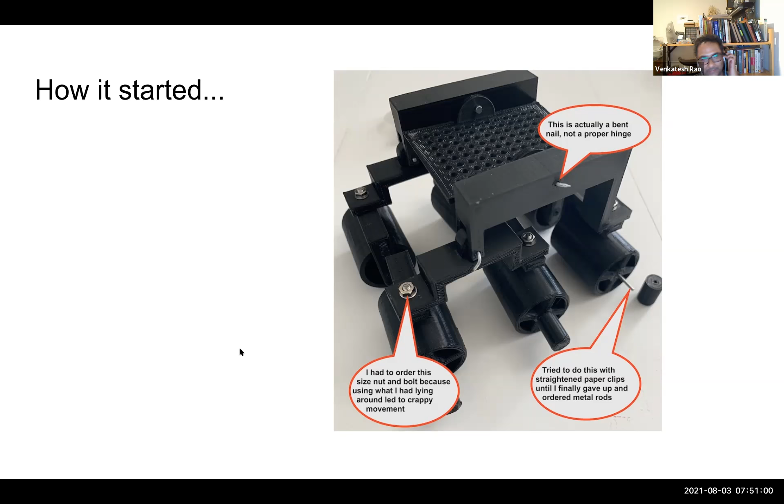And I tried to initially make an axle out of bent paper clips, but that proved to be too janky. So I at least bought some rods and made a real axle. And I've ordered my first actual part besides 3D printed filament, which was some M3 nuts and bolts. So that's where I started in January. And how it went, Jan to March, I did these design studies. Then I started scoping for parts, trying out various things in April.

If you remember my second design update, I was still thinking of using the TT motor, and that's when we had some discussions, and I think Yasha recommended the N20 because I was not aware that the N20 small motor came in multiple gear sizes. So that turned out to be a good choice. So I made the switch. I learned about turnbuckles. I built this little mechanism for trying out how the turnbuckle differential bar works. So all this was how it was going till May.

And sometime in April, I was doing a lot of shopping all along the way. So a good way to track state for my build, since it's a from-scratch, build-everything kind of build, the bill of materials is actually a good snapshot of project state. So this is what it looked like in April. You can see a bunch of interesting things here.

Towards the lower right, there were a couple of sample ball joints I was going to use. I only had the one N20 motor, but this was I think a 24 reduction motor, so one of the fastest N20s. And later I switched to a very slow, extremely high reduction motor. It was a 1:298. But okay, so this was where I was in April.

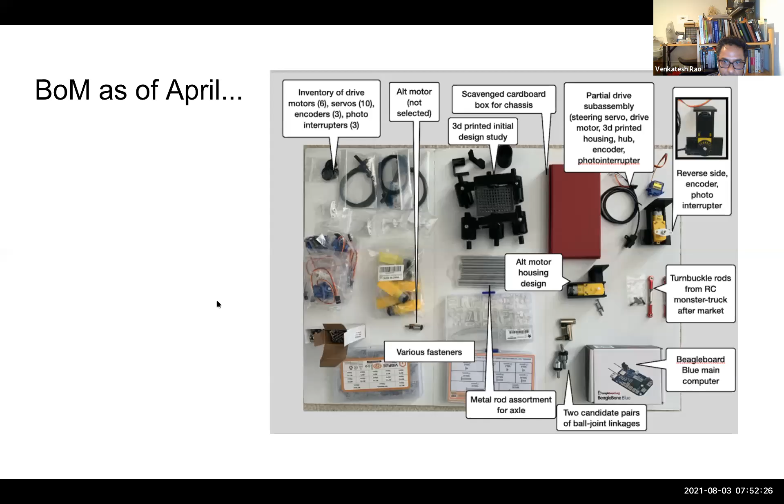Okay, so now we get to how it's going. So I've kind of split my project into two parts because the mechanical part was so complex. I realized if I waited for the mechanical part to be done, I would never get to the electrical and compute. So I decided to build the simplest mechanical thing possible just so I could get to the testing of all the electrical components and compute.

So going with my naming scheme, since my main build is called Nature is Murder, I call this Accessory Before the Fact. So an accomplice before the murder. I'm very pleased with that name. But it's just a single piece body. Instead of 4 drive wheels, it has 2. It still has 4 steering servos like the main build. It has 2 passive wheels.

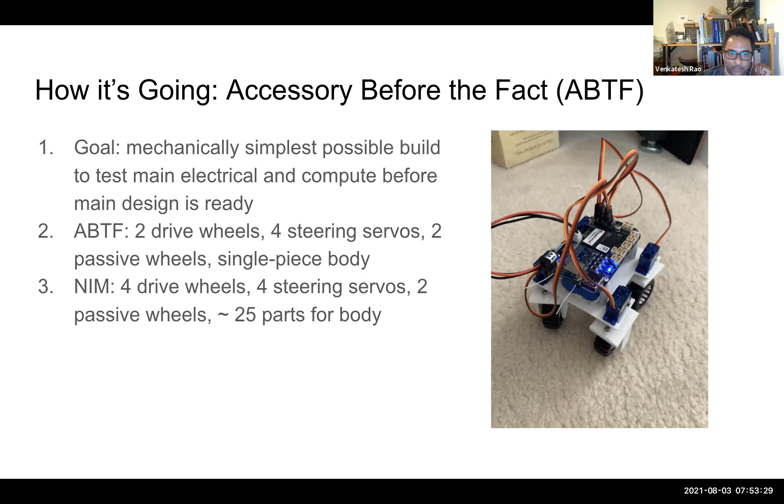But the main thing is the body is just one piece, a single 3D printed piece instead of about 25 for the main build, as you'll see. But even that ran into problems. So the first chassis I built, I kind of just winged it and printed it. And then I realized, I forget what they're called, the riser strut-like things. What are they called? There's a specific word for them. Screw boss? It's not screw boss. Standoff, yes.

So standoffs. So I had these integrated standoffs that I designed, but I forgot to measure the battery. I kind of just eyeballed it. Turned out to be too low. It wouldn't fit. So then I had to redesign, as you can see on the right, and that was big enough to shove the battery underneath because I wanted the battery below for a lower center of gravity.

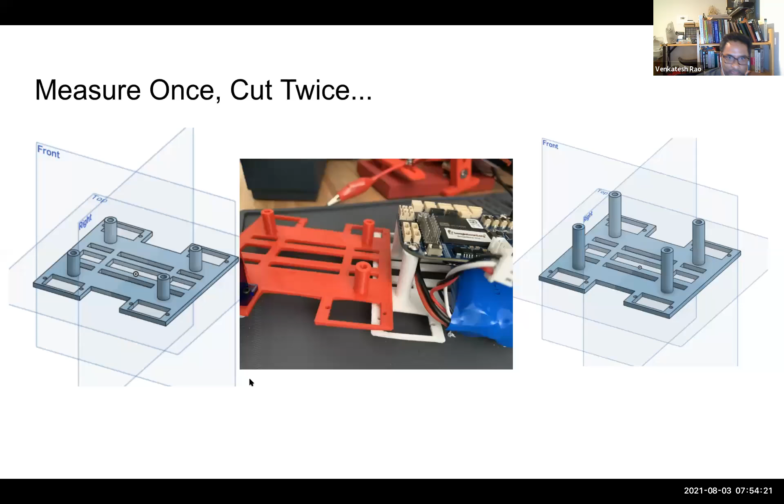Oops. Okay. So this, after printing and everything, took like a whole day to build, and it looks simple, but there are lots of subtleties. This was weirdly more challenging than I thought for kind of stupid reasons, which I should have really anticipated. But I got it done, so this is proof.

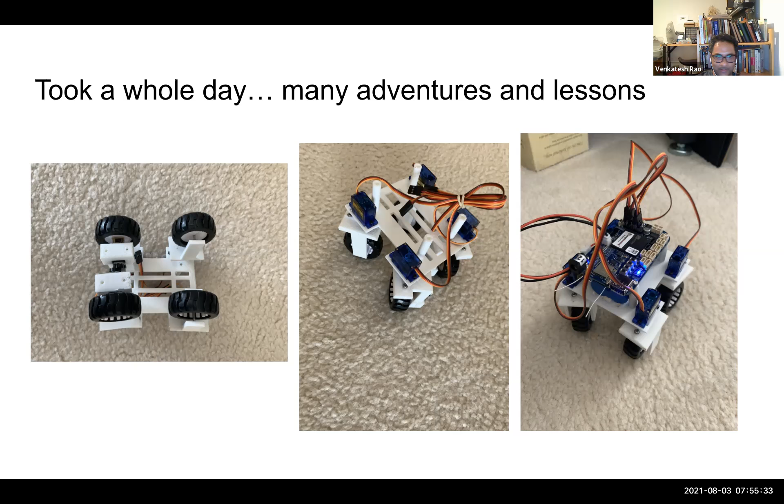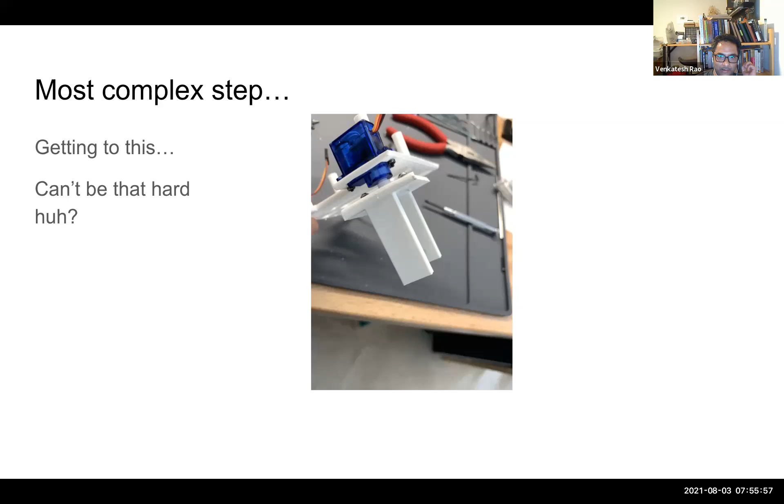So the most complex step was basically this: this is the SG90 servo. It just goes through a hole affixed to the main chassis, and then it is bolted onto the motor fork. This is actually the passive wheel fork with a horn. So this can't be that hard, right? So look at all the things I managed to get wrong.

So in my initial design for the little strut, I forgot that I actually need access to the bottom of the servo horn to screw it onto the servo motor. I didn't design that into the print, so I had to drill holes afterwards. But that turned out to be useful because I next discovered it was really hard to hold this servo horn down on the part, clamp it firmly enough to fasten it. But now that I drilled the hole, I could just hold it with a bolt. So that turned out to be dual purpose. That was my work holding solution.

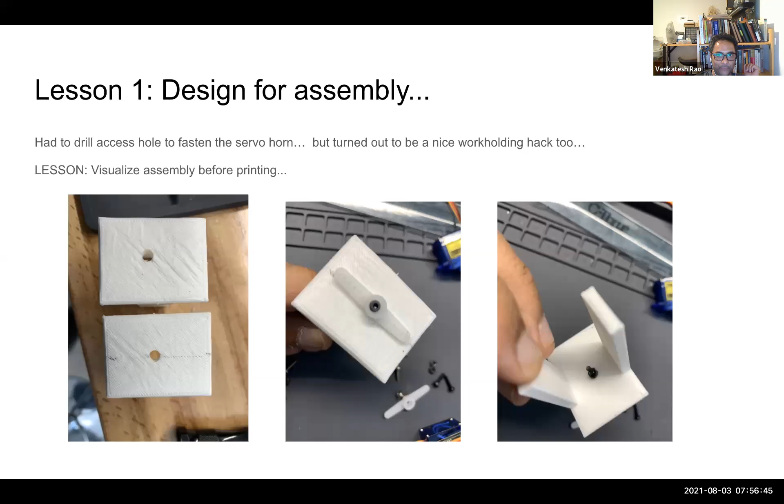So visualize assembly before printing. It's kind of an obvious thing they teach you in mechanical engineering school, but it's easy to forget something as simple as you need a hole to screw things in.

Another one, so the servo motor and horn came with a couple of screws, which it said were self-tapping screws. So I assumed I could just shove it through the hole and screw it in. Turns out it didn't want to really go into PLA. PLA is stronger than it looks. And what happened was, it's a very small, delicate screw. It's like, I think M2 or something.

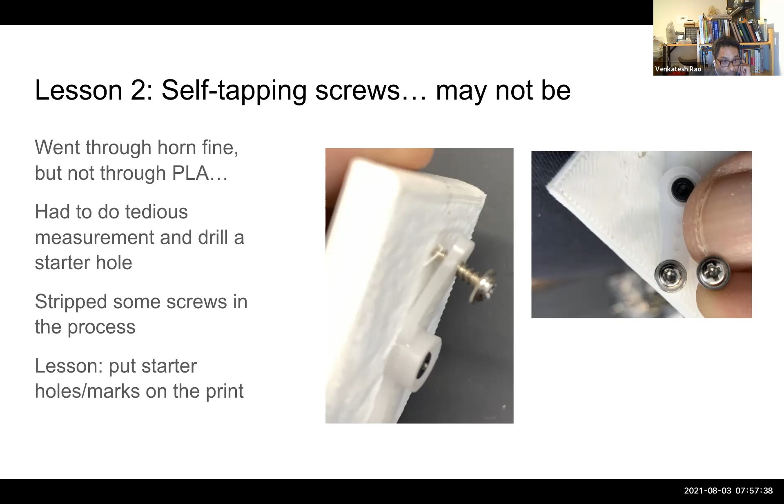So as I was turning it, it was just pulling up the horn. It was not penetrating the 3D print. And I managed to strip the screw head, as you can see on the right. So basically, then I had to pull this off, drill starter holes, and then I was able to fasten the horn. And I kind of had to use needle nose pliers to tighten the screws because I'd already ruined the head. So lesson is put starter holes and marks on print everywhere if you can.

Lesson number 3 from this initial build. This actually initially worried me, and it turned out to be easier than I thought. So I bought these 6 wheels, or toy wheels basically, for the N20 motor. As you can see, it is cut for a 3mm D shaft over here in the middle. And I didn't know how to do the passive roller wheel with it, but it turned out I could just shove a 3mm shaft in and it rolled pretty well.

So this is a good enough solution for the accessory before the fact, because this is not a rugged design meant to actually do roving. It's just meant to test the motors and electronics. So it's good enough for this. But for NIM, the Nature is Murder main build, I'll probably be designing separate passive and active wheels with the proper bushings or bearings.

This was a fun one. So for the passive strut, that's this one, to hold the wheel between the 2 parts of the fork, I wanted to get the size exactly right. And I wanted basically a compliance interference fit. So shove a rod in between. This is not a through hole. So I just wanted it held in between the 2 ends of the fork. And I thought a clever hack would be to cut a toothpick approximately to size to make sure it fits directly in the fork. And that turned out to be about 27mm.

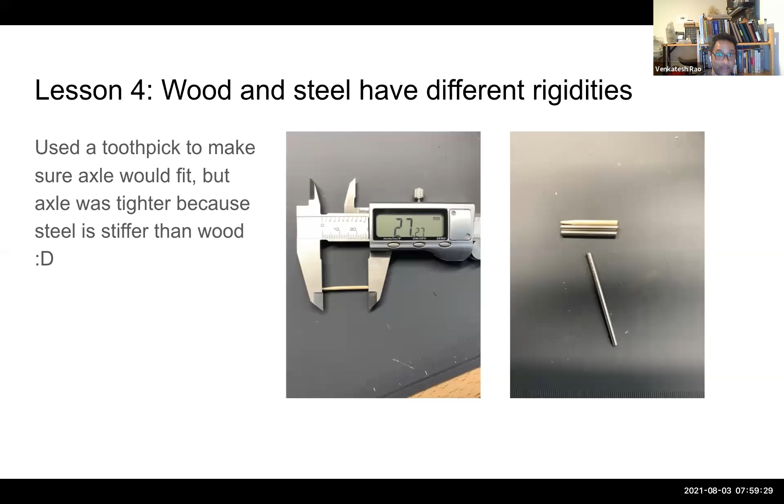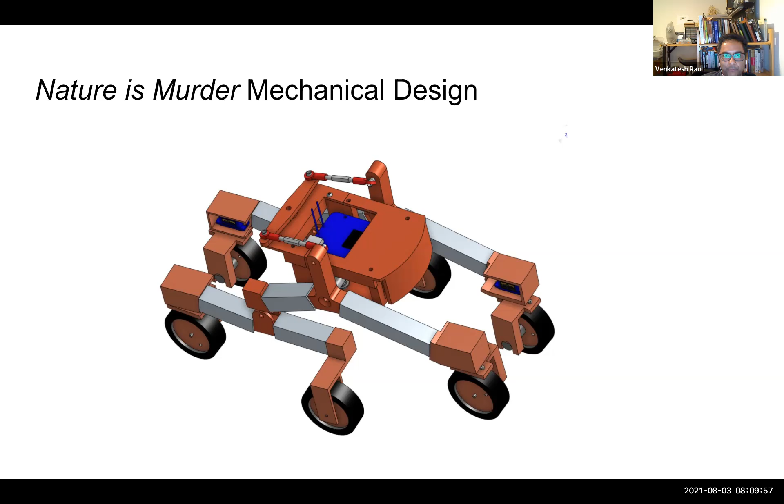All right, so this is where I think I've made the most progress: the actual build of the main mechanical design. I'm trying to be smart here and do as much as possible in the CAD tool, so I have to do minimum iteration cycles of print, redesign, and stuff like that. So I'm actually putting a ton of effort into this.

Just to give you a quick idea of the boundary conditions here, there are 4 major large physical components that constrain the design of everything else. You've got the board itself with its constraints of how big it is and where it needs to fit. You've got the ball joints, which are the most complex linkages for connecting the body to the rocker-bogie side mechanisms. You've got the battery, and then you've got this turnbuckle linkage that I bought from a hobby shop.

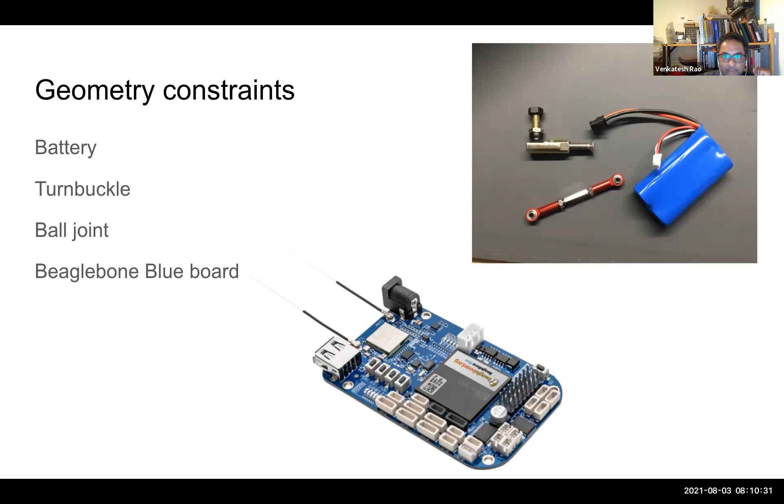So let me escape this and switch to Onshape so we can look at that.

All right, can you guys see my Onshape dashboard? Okay, all right.

Honestly, I'm feeling proud about this. This is the most mechanical engineering I've done since 1997, when I got my mechanical engineering degree. Looking at what I've done here compared to what it took to earn that degree, I feel like almost a fake. Actually building a fairly complex real thing is so much more work than just hacking out a term paper project level stuff. Back then, of course, AutoCAD was primitive, parametric design was new, solid modeling — the first solid modeler I used was during an internship at a robotics lab in Bangalore in 1996.

So this was a defense robotics lab, and we used Pro Engineer and I-DEAS, the very early versions. My actual mechanical engineering drawing classes were all on 2D pencil and paper, like actual drafting with a T-square and a drafter.

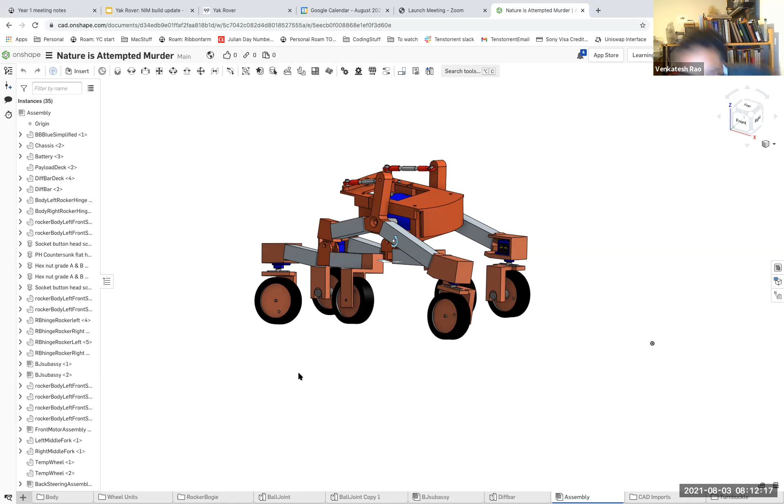All right, so this is actually a fully assembled kind of thing, and this was a bitch to assemble, frankly. So let me increase the size. Is it big enough for everybody to see?

Okay, so let me just give you a little overview tour of the features. All the joints are live and active, and I'll give you some highlight details. But let's zoom in on a couple of interesting features before I show you some pieces.

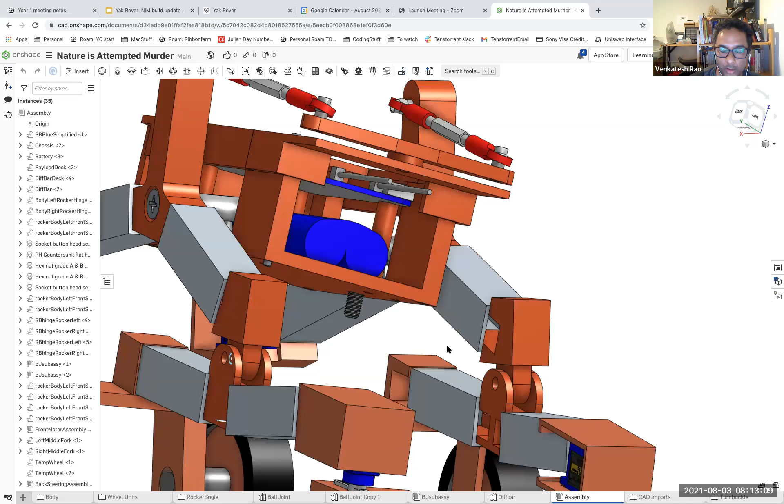The overall body construction, all the red parts are going to be 3D printed out of red colored PLA. The silver bits are aluminum tubing. Let me see if I can grab one. So this is half-inch aluminum tube, which I plan to cut into the right members.

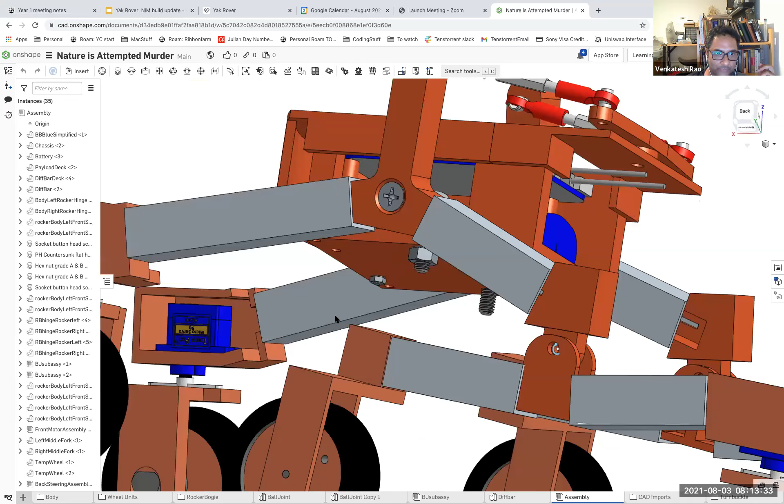And this entire mechanism is built out of press fit. So I'll show you some of the components. Let me actually see if I can.

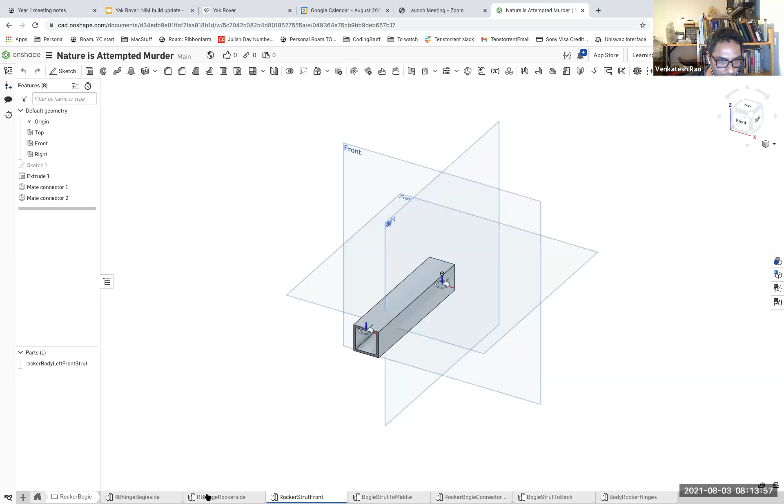I'm going to switch back and forth. Let's see. So you can see kind of the logic of how I did this. So a bunch of these struts are pieces of aluminum cut to size. Then you've got all the connector parts, which are things that look like this.

And a couple of things I want to point out, this is kind of the advantage of doing the accessory before the fact build. So the trick I discovered with compression fitting the cap on top of the motor end thing, I'm reusing it here. Little slot here that will hopefully make the compliance work, and this will just shove into the aluminum square member. So this thing should just fit into this, okay?

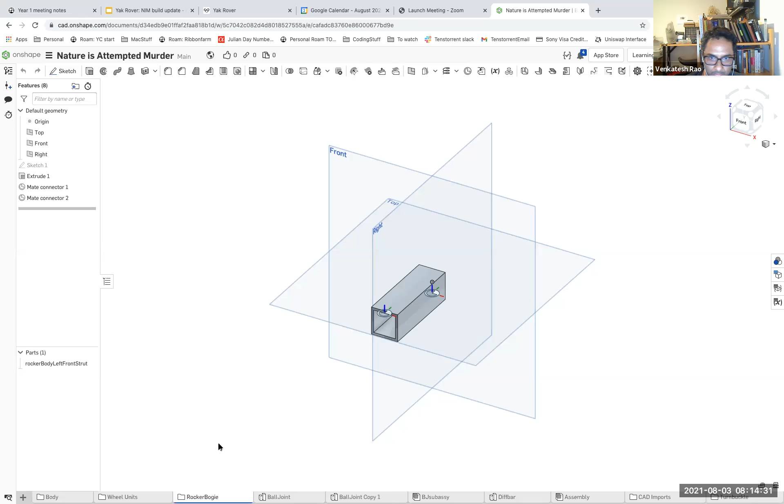And were you doing anything to increase the friction between the plastic and the aluminum?

I'm hoping compression is strong enough to do the job, but if not, the two options are: one is to drill a hole and use bolts. Nuts and bolts are bad for this, so I might use something called a pop rivet. A pop rivet is this thing you can shove in from one end and fasten from just one side. But I want to avoid that because that's basically irreversible assembly, and one of the things I'm going for in this design is to make it as reversible and modular as possible.

So I hope the compression fit will be tight enough to hold for light roving, but loose enough that with a pair of pliers, if I compress it and pull it out, it just comes apart. But if not, we'll see. There are some options, like I can do these push tab kind of things, like a hole through which a little tab pops out, things like that are possible. But I'm starting simple, just a simple compression fit.

And what about having a locking screw?

The reason I'm asking, the robot shakes, it jumps around, and these friction fittings can move.

I think from my experience with the accessory before the fact, it's pretty tight. I think it's not going to jar loose if I get it right. But if it does, my initial plan is to just make it tighter, like reprint the part with a narrower slot or something, and try to make friction do the job as much as possible. But if not, one extreme solution is just glue. Once you've got the final assembly done and the wire harness threaded properly, you can just glue it together if you don't intend to take it apart.

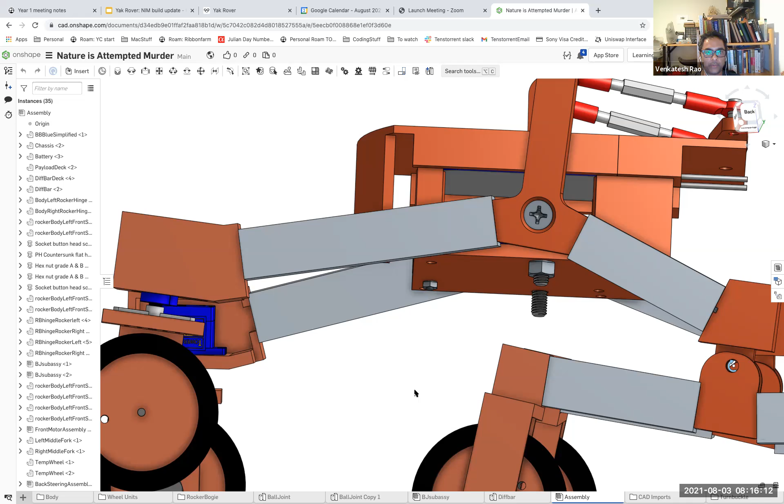Let's see, a couple of details.

If you look here, all these joints are 3D printable with no overhangs, so they can be 3D printed without too much complexity. There's a couple of exceptions, but mostly they can be easily 3D printed.

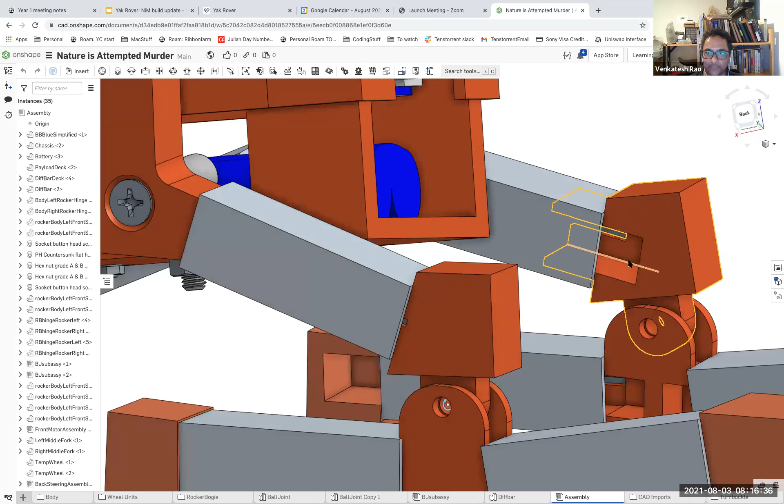So this, as you can see, is a little hole. I've designed this so that where the aluminum tube fits into any of these parts, a little gap is left, and this is for threading the wire harness through. For example, this is a drive motor. From this end of the N20, there'll be 4 wires coming out for the Hall effect sensor.

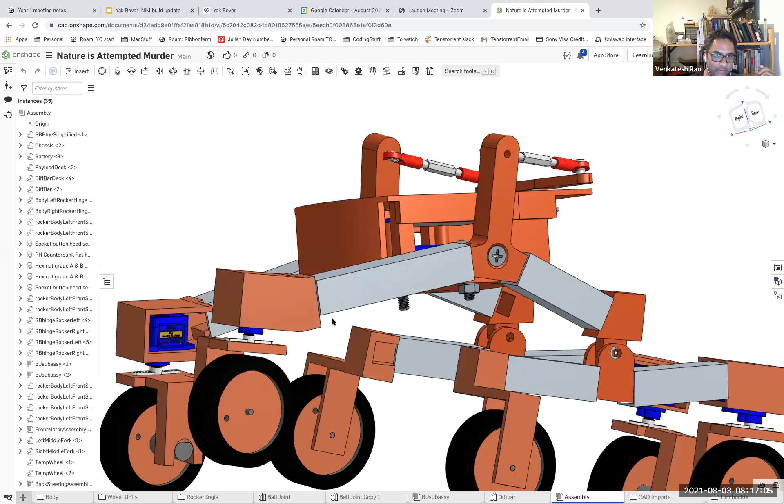It'll go into this, and then thread into the tube from there. Let me hide some things because they're getting in the way. So you can see the logic: the wire will thread through here, get into this tube, come out of this gap here, and then go to the board. Same thing over here—it'll come in through this tube, come out through this one, go up into this one, come out through this hole, and then go to the board.

I'm hoping that the portions where the wire harness is exposed and open to getting damaged, cut, or weathered are fairly limited, only around the moving hinges. The reason this even has to be done is that this is too compact—this whole rover is going to be about the size of a shoebox, so there's not enough room to thread all the wire completely internally. You could make the joints more complex so everything is inside, but at some point that'll make the size larger or the design way more complex.

Okay, so that's how the wire harness works. That's the main chassis, and you'll have the BeagleBones sitting here. Oh, by the way, all these little things you see are mates—mates and mate connectors. These are how the different parts are joined together.

Some of them are active, like revolute joints or hinges, and other things are fixed joints. Let me hide all of them because they're in the way—if you look on the left sidebar you'll see just how many there are. There's 42 mate features already. Can you see on the left sidebar? 42 mate features. And I don't know how many parts—I've lost count at this point.

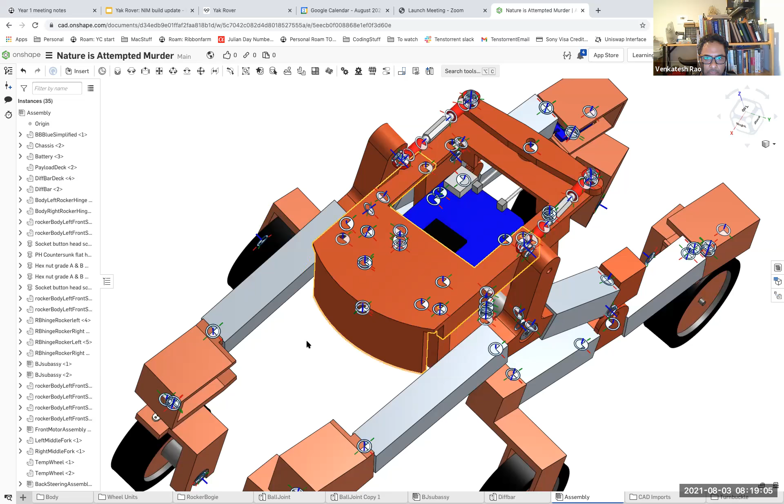Okay, so this is the top view, and this part that I've highlighted is basically the payload deck. I have a couple of thoughts on this. One is that this is likely just replaceable—if you want a payload deck that can do camera, you'll put on a camera deck, and if you want one with a little manipulator arm, you can put that on. That's one way to do it.

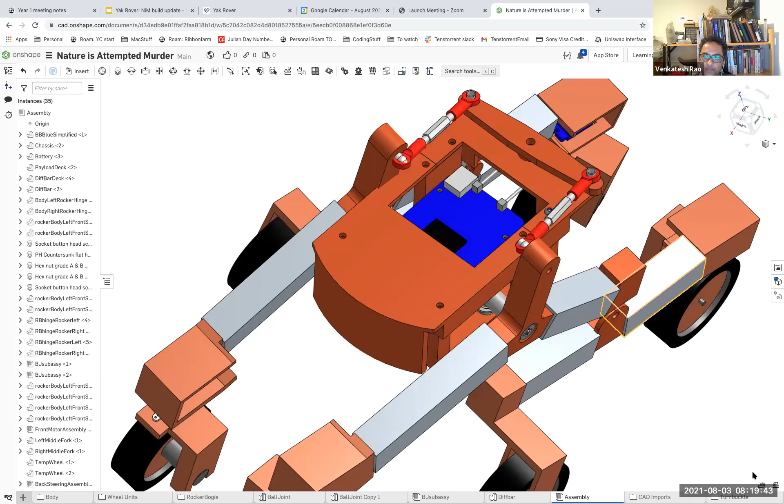Another way is to add a few more holes here and have a landing deck on front that can be bolted on, same thing in the back. In the back there's a little bit of room—this deck is basically there to hold the differential bar pin joint, but there's also room here. I could attach or extend this so that both the front and rear decks can be expanded as much as allowed by mechanical stability and geometric interference.

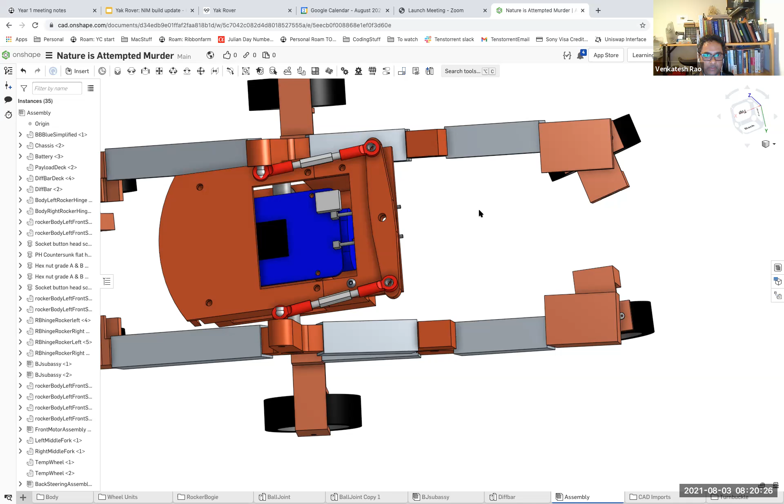Within those constraints, I think the motors are powerful enough to actually move quite a big load, so it's actually just geometry that's constraining it. So if you have the right stability balance and geometry, this will work.

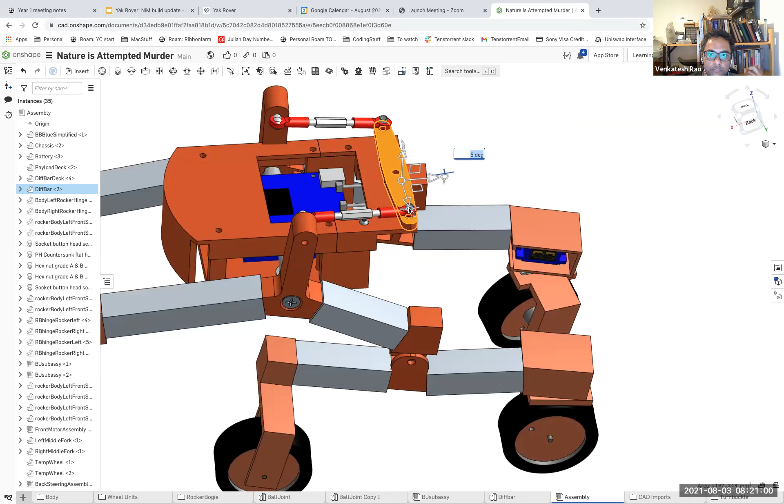This is obviously the most complex mechanical part—that's the differential bar. It's connected through these turnbuckle linkages to these rocker hinges. I'll tell you a little story about that, but let me just show you how that'll move. I'm going to move it a little bit and you can see—oops, wrong direction. Okay, can you see the mechanism moving?

So this is already pretty much ready, with a little finishing touches, to import into an animation tool and be put into a simulation program. This would be for a very high fidelity mechanical simulation for things like dynamics, friction, is it going to fall, is it going to topple—that kind of simulation is what I have in mind. But simplified versions of this could be more mission-level, like how are you going to get from point A to point B. But this is fairly detailed.

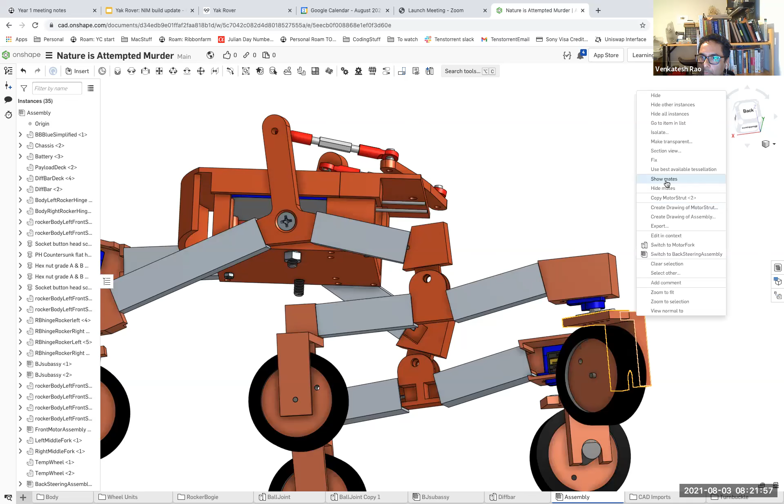Let me show you a couple more of such animation things. This Onshape actually allows you to do some animations. Let's hold on just a second. There's an easy way to do this.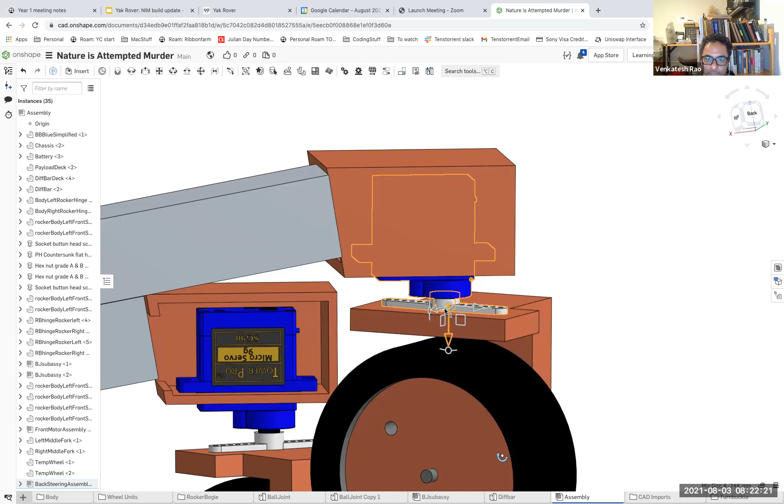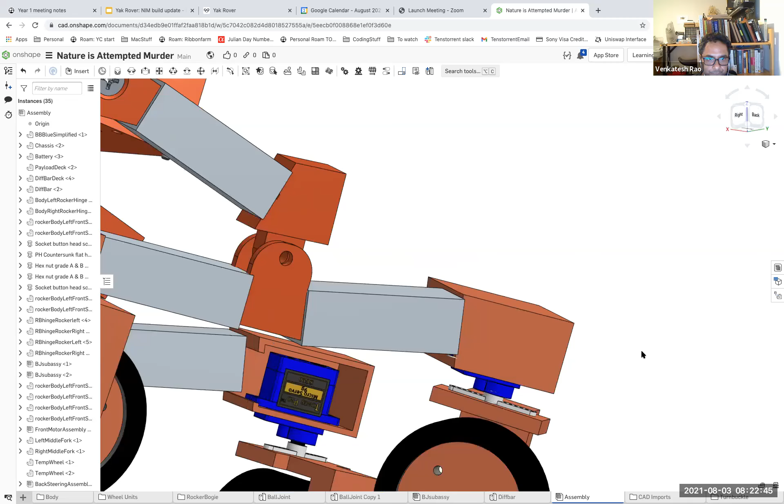All right, never mind. I'll show it in a simpler assembly or something. Wait, this is all attached. But yeah, you can animate these things. I'm still learning the animation features, but yeah, I can manually move a few things around.

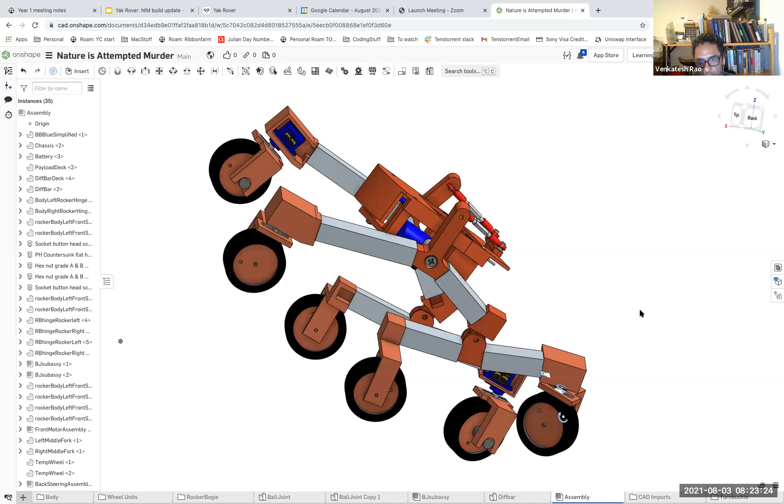And this is a constraint solver, by the way. It's got 1, 2, 3, 4, 6 ball joint linkages and something like 10 cylindrical linkages. And all these are defined in the assembly diagram. And when you try to move it around just manually, it'll actually try to do the constraint solving and move the whole mechanism around. So let me try and illustrate how this works.

Okay, this is not solving very well. This one should solve well. Yeah. So it tries its best to solve. It's not very good at it. So it won't always move the part you think is going to move. It might move everything else to solve the constraint. Anyway, it's very easy to get this horribly mixed up because it does not check for interference.

And one of the limitations of Onshape I've discovered is it does not allow you to constrain ball joints by how much they can move. So a ball joint gets defined as a ball that can just basically roll inside another hollow ball, which means, so this is where my fun story comes in. When I was initially trying to integrate the turnbuckles, I didn't get the length quite right. And when I created those constraints, it went crazy.

It turned this into a completely messed up pretzel, and nothing I could do would get the whole assembly back in order. And eventually what I had to do was basically turn off the constraint of one of the ends of the turnbuckles and then manually rearrange the whole rover to look right. And then arrange the turnbuckles to the right length, reinforce the constraints, and then it was able to solve.

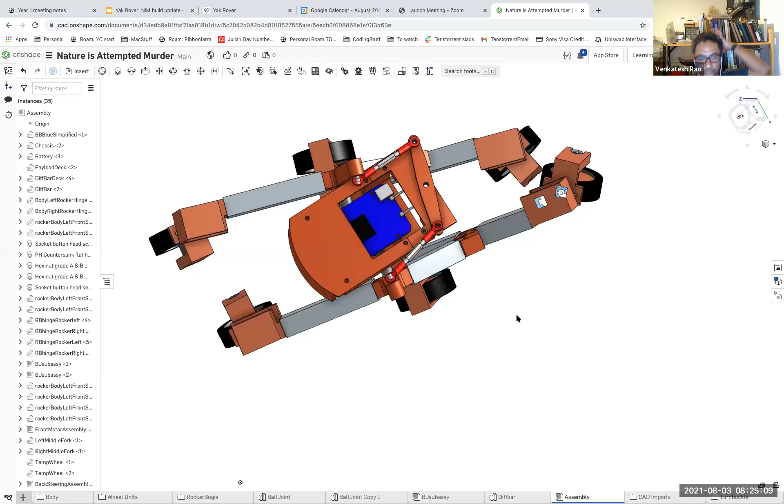And I think what was happening was when I initially assembled it, even though it was possible for it to actually get to the right configuration, it was near some other local equilibrium of the mechanism, and it was going into some pretzel shape because it was not constrained enough in the design. All right, so a couple other things, let's see. Oh yeah, so this was the hardest freaking thing to design.

Does the tool impact the angles we see on the rocker bogie? The what? You know, on the rocker, it seems that there is an angle that is going. You have the V shape for the bogie, and the rocker is, or the contrary. Could you show it again, please? Let me go back there.

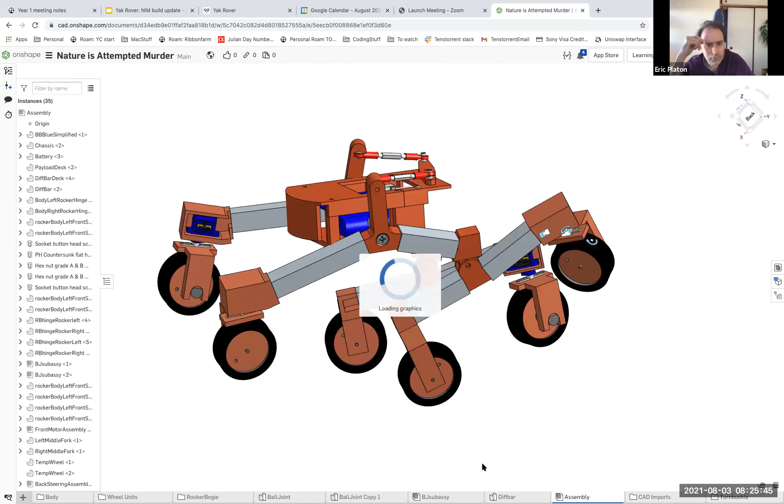Yep. So these are fixed angles. These joints, 1, 2, 3, 4, 5. So there are these 5 elements. I just lost all my highlights. Let me re-highlight them. So yes, 1, 2, 3, 4, 5, 6 plastic parts that connect the aluminum things. Each of them has specific angles, and that's fixed.

Initially, I was kind of trying to be more ambitious and making those reconfigurable angles as well, but that got too complex. It was introducing too many angles. So now my plan is, even though I can change it in the parametric design, I'll show you a couple of examples. Even though I can change it, the idea is just to keep it fixed for one design.

And this is, by the way, very rough geometry. I've just roughed it out, and now I have to do the projection on the flat plane and actually do the calculations and get the geometry exactly right so that the wheels all line up on the flat surface and stuff like that. So I haven't actually done the final calculations. Think of this as a topological design. So the topology is correct and the geometry is roughly correct.

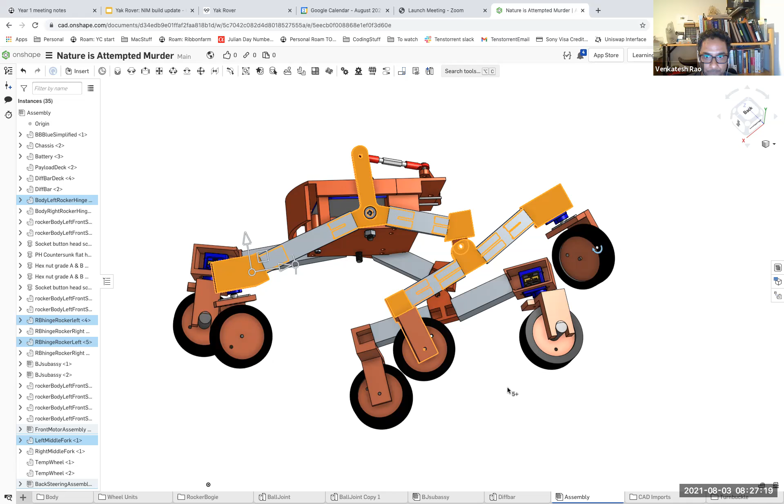Now I have to get the geometry exactly right so that the 6 wheels are on the ground at the same time, and the hinges are in the right nominal position. So that still has to be done. But yeah, all these are angles. So let me show you a couple of examples there. Okay, so this is an example. Let me.

So this is the first plane that then got projected out into the part. And you can see this particular part happens to have a 20-degree cant. And so all of them, there's like 4 or 5 angles I have to set, and that'll determine the overall geometry of the rocker bogie mechanism. And I don't yet have any intuitions of how the geometry will affect, like, the stability or how it moves or rolling stuff. I have poor intuitions, and I don't want to attempt to get it from first principles.

So I'm going to try and get it roughly right, print it, build it, run it, and then start tweaking and seeing, all right, is this angle too much? Is it getting stuck in a rut? And then sort of finalize it, because I don't think I'll be able to figure it out from first principles. Maybe somebody much smarter than me at geometry can do it. I'll have to do it by actually building this damn thing.

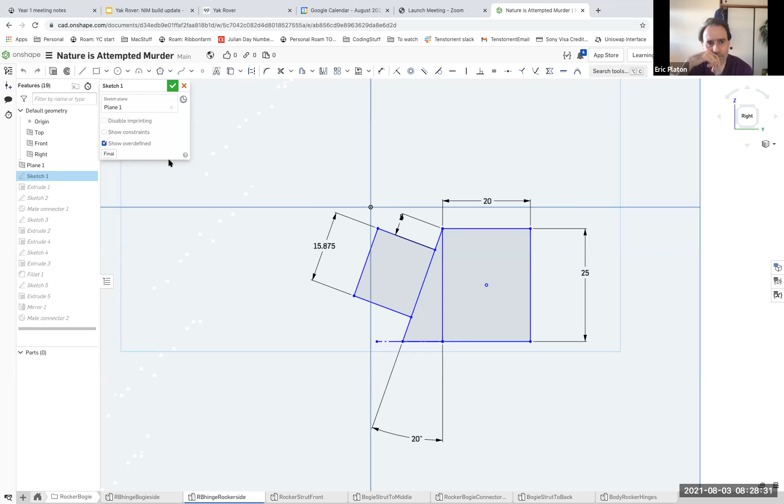All right, so that's this part. Let's see, what else do I have? Wanted to show a couple more features of this. Let's see, diff bar. That's the diff bar. That's not that interesting.

All right, turnbuckle. So this is an enormously complicated part. These two are ball joints. Each end is a ball joint inside like a ball-shaped cavity. So it's like this little ball with a tube shoved inside it that can move like a ball. I think I have one somewhere right here. Give me 1 second so I can show you a physical one as well.

I think I showed you guys last time, but just as a reminder, this is what the physical one looks like. I don't know how well you can see it. Each of the ends revolves. I don't know if you can see me moving it, but the little barrel-like thing moves. And the middle part, if you turn the middle, it'll actually unscrew and you can change the length. So it goes from about 66 millimeters to about 100 millimeters.

And these two screws that connect to the middle, one is left-handed, one is right-handed. And that's because they're torsioned in a way where if you don't have that right hand, left hand configuration, it'll sort of get loose. These mechanisms were first designed for tightening cable-stayed fixtures. So like, a ship's rigging, if you have a sail rope holding the mast, and then at one end it's fastened to the deck, you'd have one of these mechanisms.

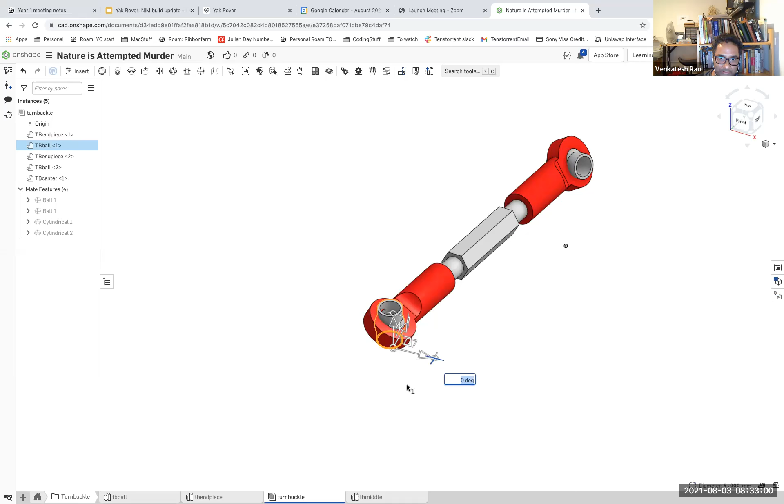See it. Can you see what's happened there? It's messed up. Because you can't actually define a constraint on a ball joint that says that on azimuth and altitude it has this much angle capability, this is basically a ball inside a ball. So if Onshape tries to animate this too liberally, let's see if I can animate this, you'll see what happens.

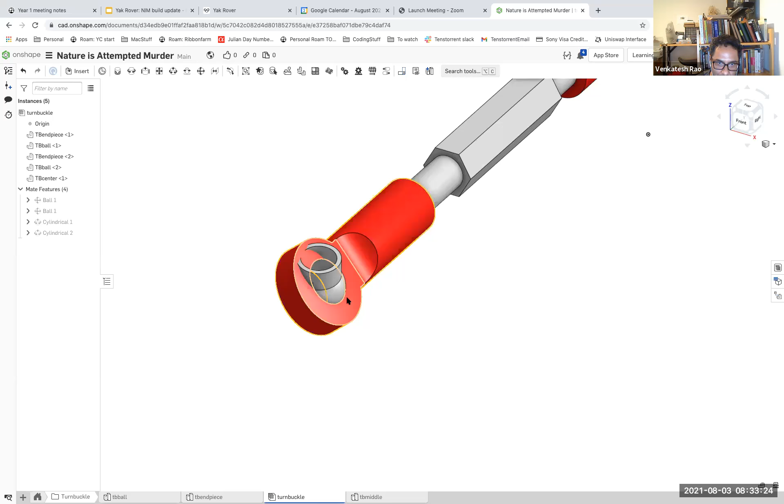You can't put a constraint that the cylinder won't bang into the red thing? That's called an interference constraint, and I don't think Onshape can do that. Okay. Unless there's a way I don't yet know. But let me show you. Yeah, this is how it moves.

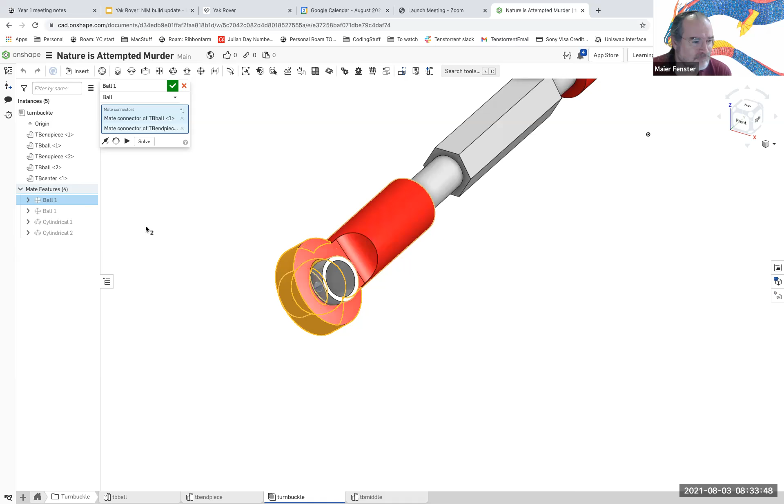It's not the greatest. So there may be a complex way to do this, but typically at this point, you kind of give up on the kinematic level of CAD and you would take this into a dynamics package and do it in a different way. This is at programming level. At this point, you should be writing a script to govern the constraint solver a little bit. So I'm not trying too hard for all that.

There's a point at which doing things in software and CAD becomes too complex and you do the simplified model in CAD, and then the real thing is actually much better behaved. This thing is actually a much simpler part than the virtual one that's sitting on the screen. So it's the judgment call of, I'm just going to switch to the physical design and iterate over there at this point. And if there's issues with the turnbuckle linkage, I'll figure that out over there.

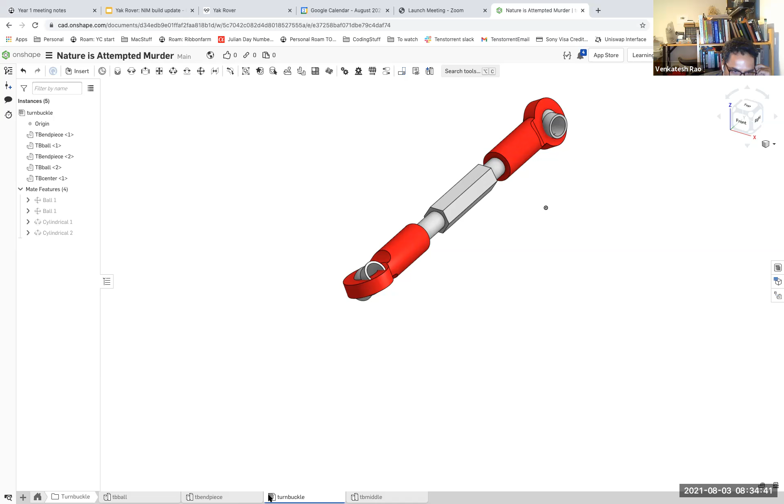Let's see what else. And this took a while to do. I had to learn a lot of things. This is the interior cylindrical / spherical thing. I had to learn quite a few little tricks to draw these things in Onshape. So it was a lot of fun. This was probably the most fun thing of this part of the design.

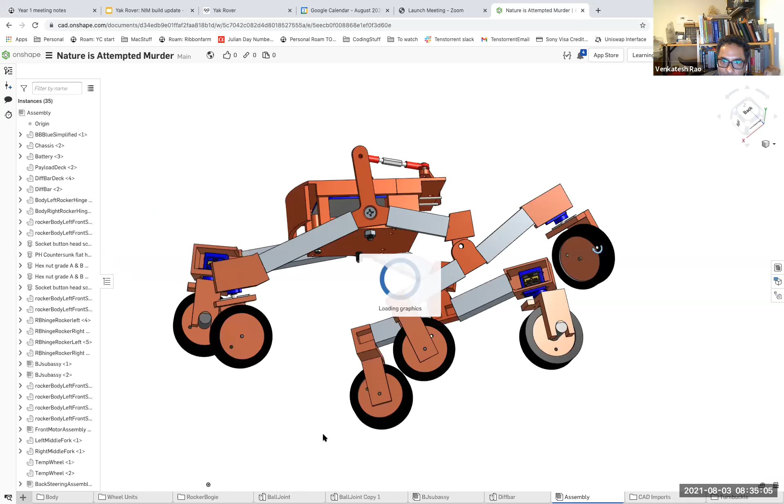But let's take one final look at the assembly and see if there's any other overview things you guys want to see. Oh, one more thing I want to show. It may not be super visible, but initially you can see that I have the middle wheels pushed out. And I have this vague idea that if I can get all 6 wheels to fit inside a circumscribed circle, then if I have the wheel angles correct, like a hexagon, it should be able to rotate in place very smoothly.

I don't think that's going to work out. It'll have to be too far out to do that. I can make the body a little wider and I can make the struts a little shorter. But I think I'm going to give up on rotating in place as a thing. It can still do it. The middle wheels are passive, so they'll drag a little bit.

You can sort of do the 4 drive wheels at the right angles to create a circle and then do a circle. And then the middle wheels will do whatever the hell the passive wheel will do. You could do casters, you could do omni wheels or something, but too complicated. I'm going to just give up on that maneuver for now in this build. So that's something to look at. And what else is here?

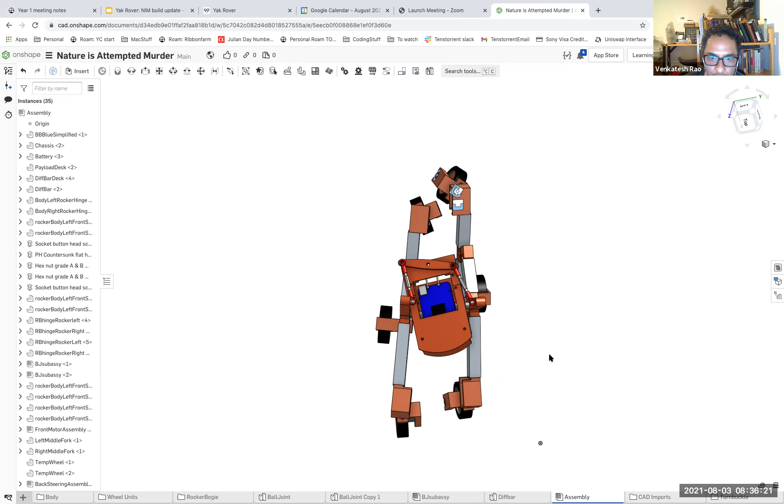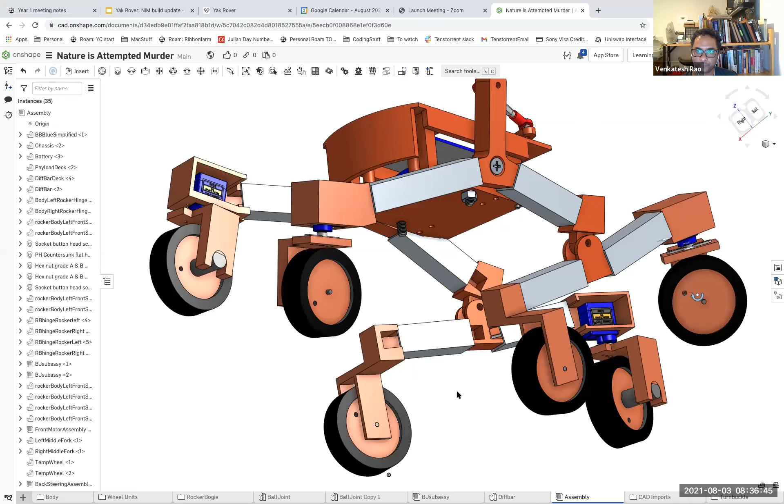I have left room for the middle wheels as well. These are passive wheels, but I could still put instrumentation in them. I could put an optical encoder on this axle and measure its speed. If it comes off the ground, it's going to go 0. So those kinds of things I can measure, and there's room for cabling to go through there to the main body. All right, so this is the mechanical design.

So now I have to refine it, get all the dimensions exactly right, make sure it's actually fabricatable, each part. All those assembly constraints I have to think through, like is each of these actually assemblable? Like I just realized something, this servo motor, I don't think it can be assembled in this position because the part that juts out below and holds onto the horn, I don't know that I can maneuver it into that hole. So that's something to think about.

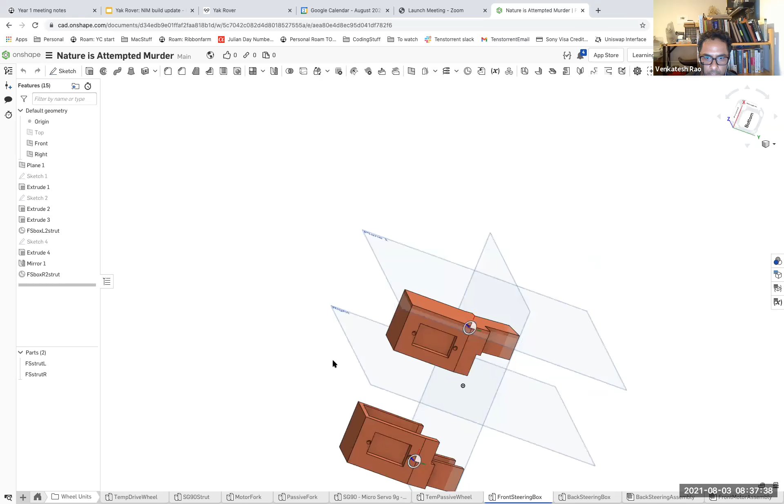And if I go back to the real units, let's see. Oh, the SG90, I found CAD some open source guy had done. Let's pick this one. So these are the steering boxes. So that's the hole through which the servo motor, steering motor, sticks through. And if you think about the assembly problem, the motor has to be shoved in and put in through the hole.

And the reason I'm kind of belaboring these basic mechanical engineering things is because I'm actually interested in the research version of this problem, which is if you want to design for decomposability, scavengeability. Remember my original research goal was scavengeability. If you have half a dozen of these rovers on Mars and one of the robots dies and the other robots want to use it for spare parts, you have to be able to take it apart and put it back together again.

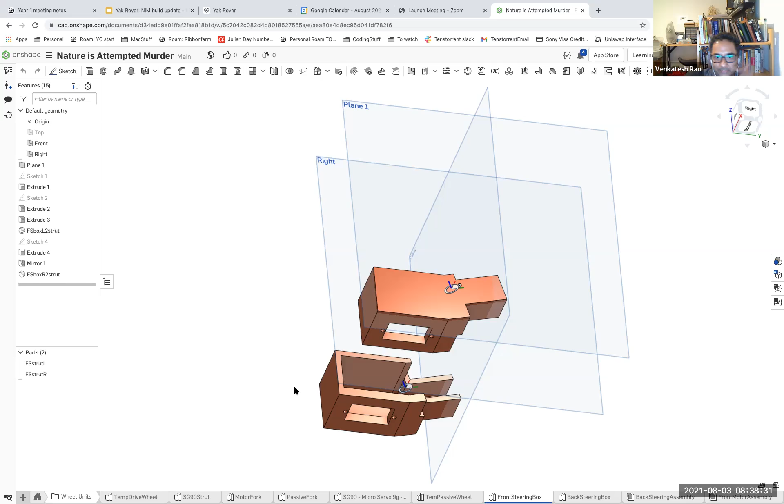So that's a much harsher mechanical engineering constraint than on Earth, where you can throw away things you no longer want. You can do destructive dismantlement. You can do lots of other things, right? Humans are more creative. So that's why I'm a little bit interested in design for assembly in a deeper sense. All right, I think that's it for my mechanical design. Any questions on this while I have Onshape open?

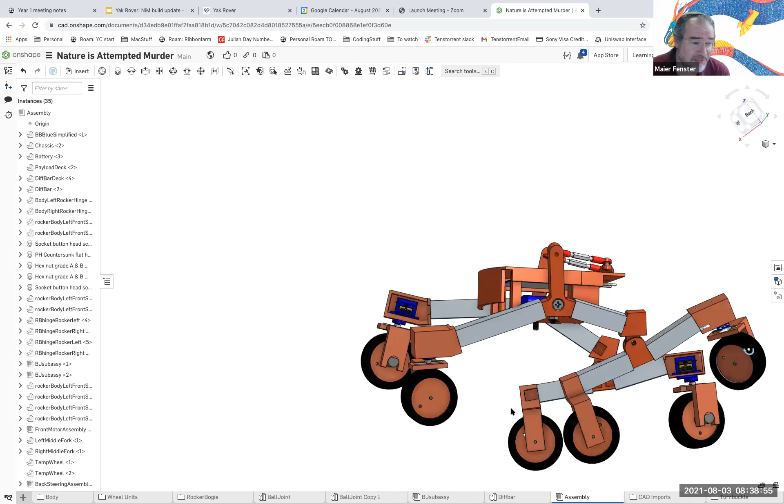Very impressive. Please, Maier. I just wanted to say it was very impressive. Thank you. Yeah, question? Eric, you had a question?

Yes. I'm also using Onshape a little since Jascha and you introduced it, and it's very interesting and there are a lot of things we can do with it. I wonder, you talked about making simulations to study where the pressure would be and so on. Can anything be done inside Onshape about that? You've chosen some angles, but before building it, maybe we can have some idea whether these angles are good in terms of will it break because of some payload.

Onshape can't do that. So that would be dynamic simulation. So you'd have to put it into a different CAD tool. I don't know what the best in class right now is, but you'd have to put it into a different thing and put in dynamic stresses, loadings, all those kinds of things. So that's something I definitely want to explore next year.

But right now, actually, the easiest way to do dynamics testing is to actually fabricate the damn thing and actually stress it. So that's what I'm planning to do, actually build this, attach a spring to it and see how much pull weight it can draw. So I bought a bunch of springs to create a traction testing rig or something. Jascha, you have some comments or thoughts on this? In a more ambitious world, where would you take this model to do the dynamics testing? Oh, the physical model? Yep.

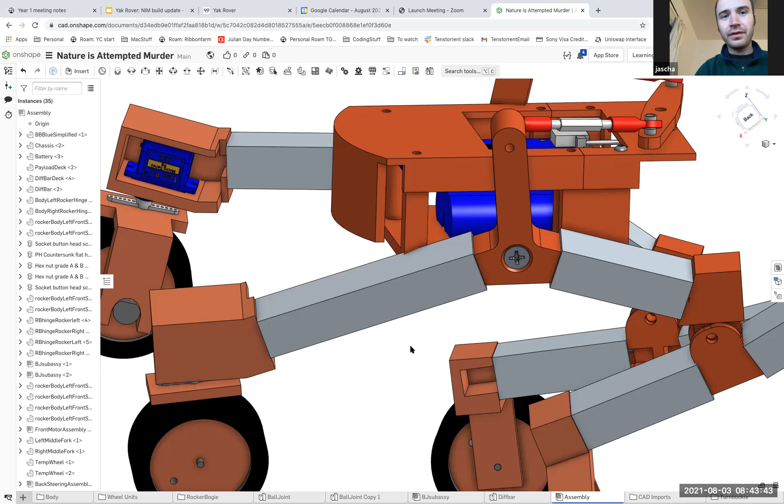And to your point, on Earth, we can have a much more sophisticated packaging system where you buy the microwave and there's a bunch of stuff inside the microwave that's packaged up and can be pulled out and reassembled internally. Here, we don't have that luxury, so it must all be external and easily deployable throughout the mission.

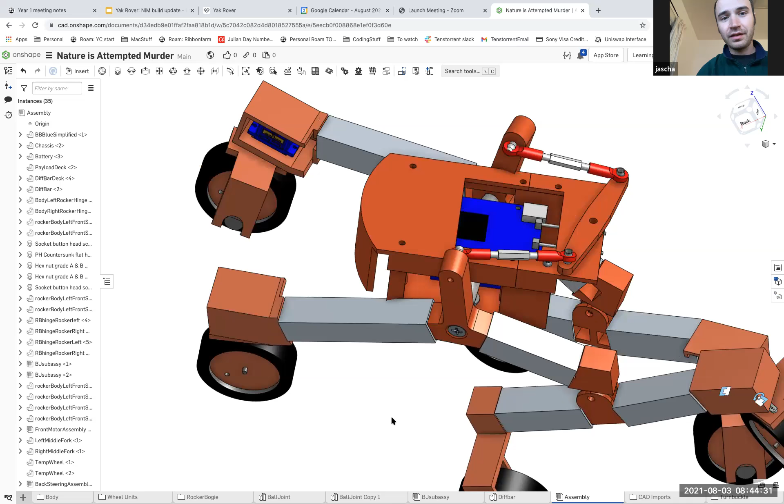To speak to the question about simulation, though, there's no native simulation capability in Onshape, but I believe the most popular add-in is the SimScale FEA package, and that can run in the Onshape environment. It's a meshless FEA package, which is kind of a new age, different way of doing these calculations. It's not included, but it's compatible. It's an add-in that can be run in the Onshape environment.

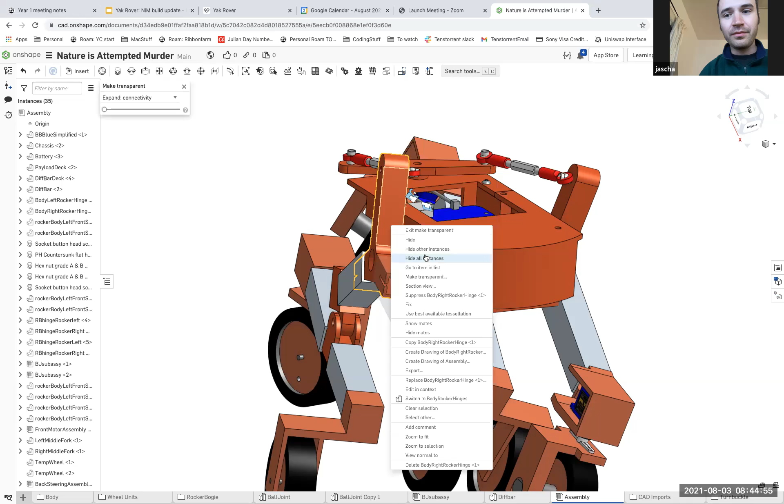Beyond that, though, the industry standard is ANSYS. And for instance, to speak to the crash simulations for automotive, the really popular one there is Abaqus, which I believe is a Dassault product. It's often used in conjunction with CATIA if you're doing, like, a Mercedes auto body or something.

So none of these really seem to have changed since I last looked into this. These are all really old packages. Is there a second generation thing like Onshape for finite element stuff, or is it all just the old incumbents continuing?

Autodesk has purchased a couple things. So the Fusion simulation is pretty powerful, and their whole push is for generative design, right? So in Fusion simulation, not only can you run a simulation, but you can define criteria and objectives to have the simulation evaluate, and then it can generatively and iteratively rerun. So this is a combined functionality that you can have in Fusion.

You could take this model out of Onshape and bring it into Fusion and then run simulations should you desire. Okay. But I would say in terms of new wave, the most new wave is probably Fusion's offering. But other than that, you are stuck with the old incumbents.

I think I used ANSYS very briefly, like 15, 20 years ago, for a couple of hours. But yeah, I know the theory of finite element stuff, pen and paper classes that I had in the 90s, but I don't have much experience actually doing finite element based simulation testing of forces and stuff.

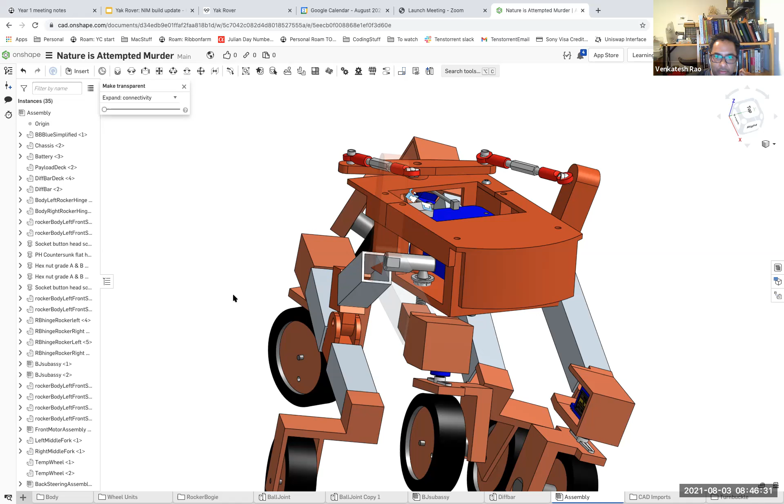The one last thing I wanted to point out is this ball joint. The CAD model I got from McMaster-Carr. This is another thing that's changed a lot since I learned this stuff in the 90s—now there are catalogs of stuff. The good engineering suppliers let you just download CAD models for any reasonably good part.

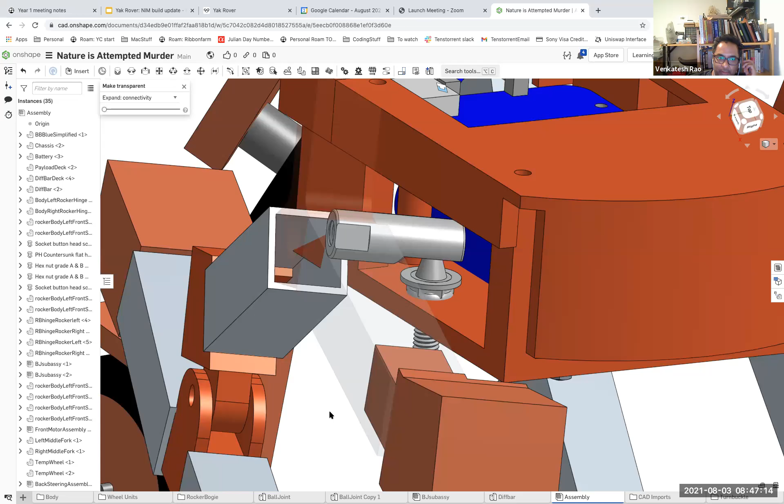It's not great—it's a ball joint, but it too has the ball joint constraint problem. It doesn't tell you how much it can actually rotate, but this is what it looks like. There's one revolute joint here. I should show this side one. Yeah, this is a standard part in the Onshape library. Standard nuts and bolts you can just insert, you don't have to design or import them. But this isn't a standard joint, so I imported it from McMaster-Carr.

Let's see what else—oh yeah, this bolt over here, another standard one. It's just an M3, 45mm long bolt. Okay, let's stop this—already I've mangled it, and it'll take me a while to get this reset correctly. But okay, that's my review of the mechanical build.

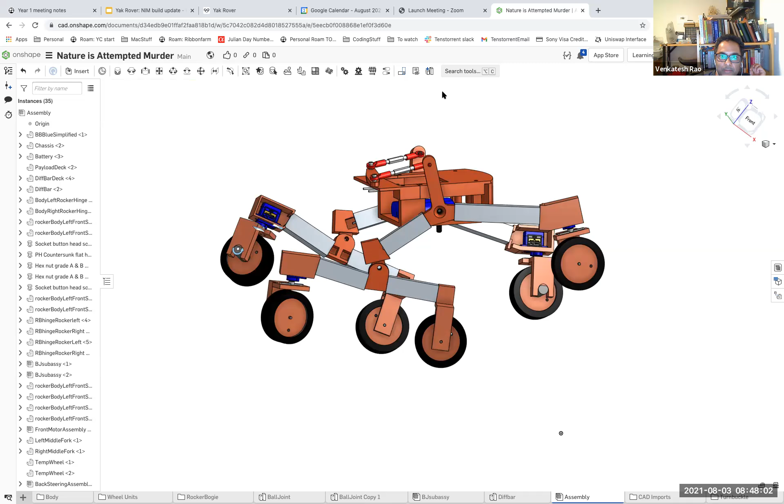So let me go back to my... I had one question about the design approach.

Architecturally, you'd mentioned that scavengeability is a design criteria you're looking to think about a bit more, but there is quite a bit of wire routing within channels, which is a very, very challenging thing to scavenge and undo. So I was wondering why you chose that approach as opposed to a wire duct or externally routed cabling. So I might still end up doing that.

This is a fairly ambitious thing to try and do. One reason is this is such a kinematically complex mechanism that things will get convoluted in all sorts of ways—joints will move in different ways, the wire harness will get stressed, turned, and twisted, maybe pinched in joints. So I wanted to make it as integral to the structural frame as possible.

There's some comments I don't want to put on a public video recording, since it has to do with client stuff I learned on a gig. But yeah, there are reasons I want to put it in the structural part, but also to make it a research problem—can we make the wire harness also modular, as in it plugs and unplugs with the mechanical components?

I'll actually get to that—one of my discussion items is wire harness, so I want to talk about how we might actually do that in the future. But for now, yeah, you're right—it would be better and easier to do modularity if the cabling were external.

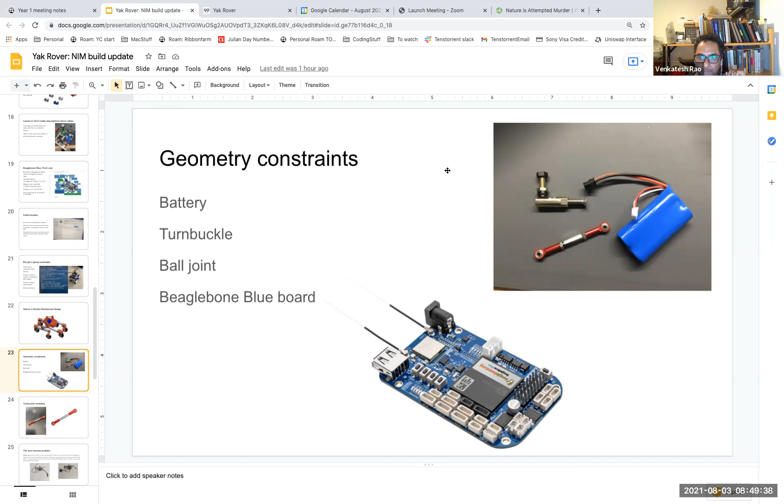Okay, so this is the basic design that we just reviewed on Onshape. Turnbuckle—we talked a little bit about one of the critical bottleneck pieces of modeling. All right, now let's talk about wire harness, which is just the topic Yasha brought up.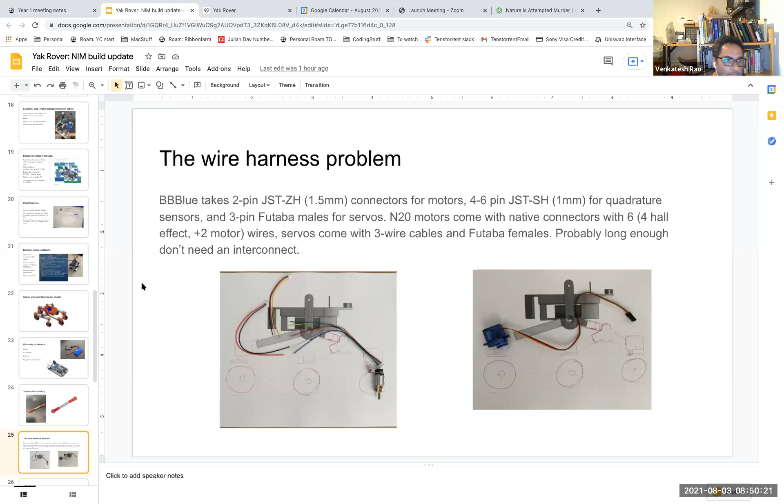So just so you have a visual again, let's go back—these are what I'm talking about. Let's go back to presentation mode. So all these are basically JST, SH, and ZH connectors. These are Futaba regular servos. There are USBs and stuff.

Oops, going the wrong way. Wait, what am I doing?

Okay, so those are from eBay and Amazon. I just bought small packs of these connectors. This one came with the motor. On the left picture, the bottom right one, it came with the N20 motor.

So it's just a connector that plugs into the 6-pin connector. 2 of those are for the motor and 4 are for the Hall effect quadrature sensor. So there's 6 wires coming out of that. On the left over there, you've got 2. So the 4 wire one towards the top needs to connect to 4 of the wires on the motor cable and go to the quadrature sensor. And then the 2-wire cable needs to connect to the other 2 wires and go to the motor connector.

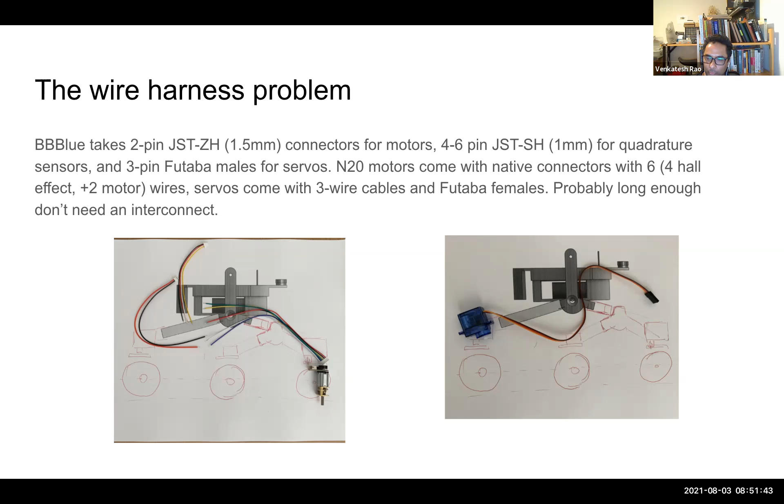And on the right, you have the servo motor, which is a separate 3 conductor cable. I think these might actually be long enough at a pinch to go all the way without extension, but I doubt it. I don't know.

This is a really, really ugly diagram. I think I was asking several weeks ago, is there a good diagramming tool for wire harnesses? And apparently there isn't. So this is just me using an iPad drawing tool. It's crappy, but the red cable is what I need to design.

Here's where the modularity question that Yasha brought up comes in. If you actually wanted a properly modular wire harness where the mechanical subassemblies can be just unplugged and replugged and you could swap them around, then basically you should be able to undo the mechanical mate and electrical mates at the same time. So just like when you undo the ball joint, you should also be able to just pull apart a plug and suddenly the whole wire harness comes apart from the left rocker bogie to the body. That's what you want to be able to do.

So the thing I've marked question mark A is the connector between the rocker bogie mechanism and the main body. That would end up being basically 9 conductors, so the simplest solution would be 9 pins. B, at the other end, you have to break it out into 6 pieces. This is just for one drive unit, by the way. So 6 for motor, 3 for servo. So 9 conductors just to control 2 motors for 1 drive unit. Times 4, there's 36 conductors coming into the BeagleBone Blue.

We'll talk a little more about other strategies, but if you wanted this particular configuration to be modular, you'd need that middle red cable to be basically a separate interconnect. Then it would basically come apart into 3 pieces. Drive units would come apart, so 4 drive units would just unplug mechanically and electrically. The linkage assembly would come apart as an interconnect middle mile, basically. And then the last mile towards the board would come apart as well.

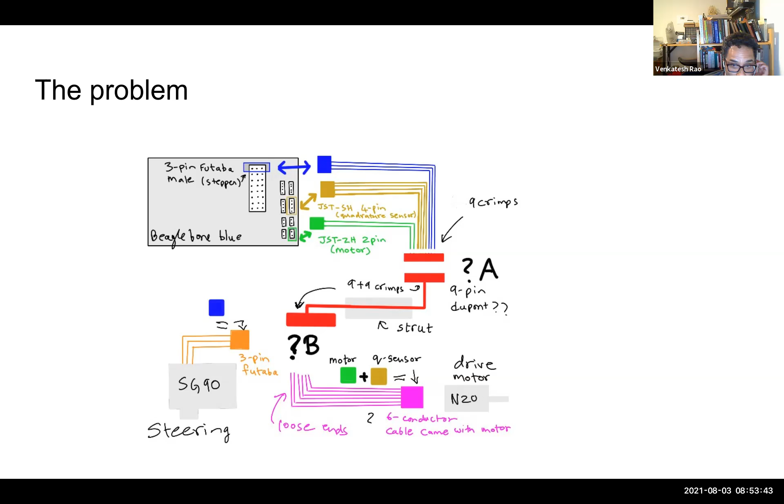So this would be one way to do the wire harness. Like I already mentioned, route through hollow members, route around mechanical joints, protect from weather, shorts, mechanical stress, blah blah blah. Try and design for modular disassembly.

For the future, I don't know enough about the electrical and computer engineering part of it to think about how you might use it with a bus. But I imagine you can do it with just a signal bus and then have a breakout board at the motor level. So a simple 2-motor controller that controls both motors, and all you send it are serial signals. Maybe you can just do it with a couple of signal lines, a power line and ground. So maybe just 4 conductors will do it, maybe even 3 - 1 signal line, power and ground. Maybe that's all you need. Maybe you don't even need power and ground if the drive units are being powered by a separate 12-volt line, which has its own voltage converters. Maybe you just need the signal lines. I don't know, there's a huge number of possibilities which I'm not competent to get into.

I want to do the simplest thing possible that'll actually work for my first build. And next year I do want to explore all this because, again, in the consulting gig I vaguely alluded to, which I think you all know which one I'm talking about.

This is a huge bottleneck. It's like this messy middle layer of the abstraction stack. Nobody likes it. It's a mess in every industry I've seen. Nobody knows how to do it well. And it's a cost and time sink. The actual raw materials cost may not be high, but teams of engineers spend months and quarters, schedules slip, entire programs slip because wire harnesses are poorly designed and messy and all over the place. So wire harnesses are actually a good research topic.

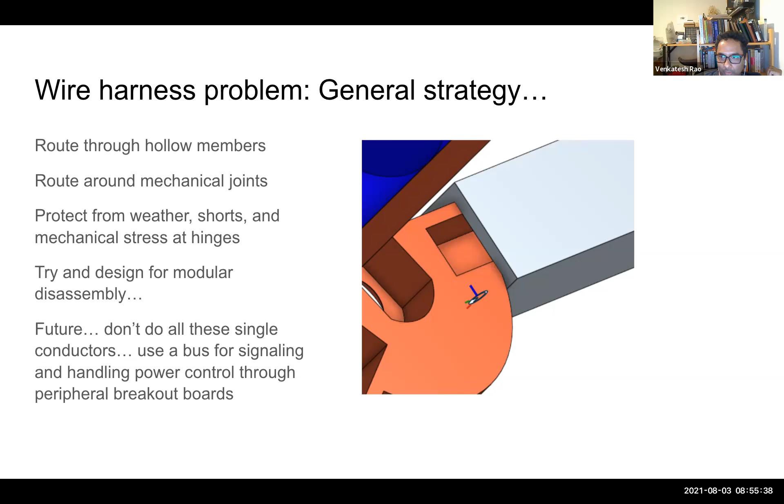But this was my first extremely naive one. I realized these ribbon cables are so thick, even shoving them through my half-inch aluminum pipe is a pain. So a bundle of like 9 loose wires is actually easier to thread than a ribbon cable. And this would have a different connector strategy.

All right, the actual physical connectors. The three I'm considering: one is the most common hobby electronics ones, which is DuPont connectors, which look like that picture on the left. They come in 2, 3, 5, whatever. They're both cable-to-cable and cable-to-board type connectors. Kind of bulky, not the greatest, but relatively easy to crimp and assemble.

In the middle, you have JST. These are JST PH, so 2.0 millimeters. So yet another - JST is like a spec that has 6 different physical types with different pin separations. This is a box I happen to have. Both are annoying as hell to try and crimp.

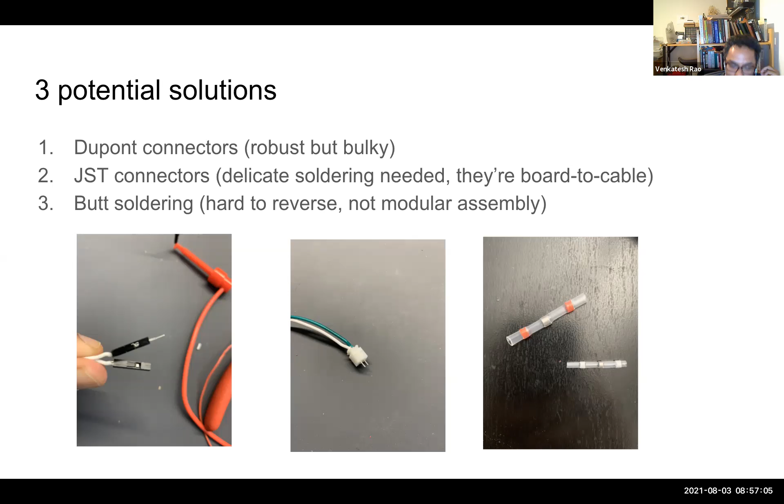And the third solution is to simply butt solder all the individual conductors one by one. Unfortunately, that's not reversible, it's nowhere near modular. So I would like to do a connector strategy if possible, but if not, my fallback is just to solder the whole thing.

On the right is one specifically for DuPont crimping. So I have JST and DuPont crimps here. I'm trying both, I really, really suck at it. This is one of my DuPont crimps under magnification, and on the right is the chart that came with my crimping tool on the standards of a good crimp. So this is just lack of practice on my part, but this is both my build bottleneck, knowledge bottleneck, and skill bottleneck - literally making these crimped connectors. It's a complete mess, and what high quality looks like is light years away from where I am.

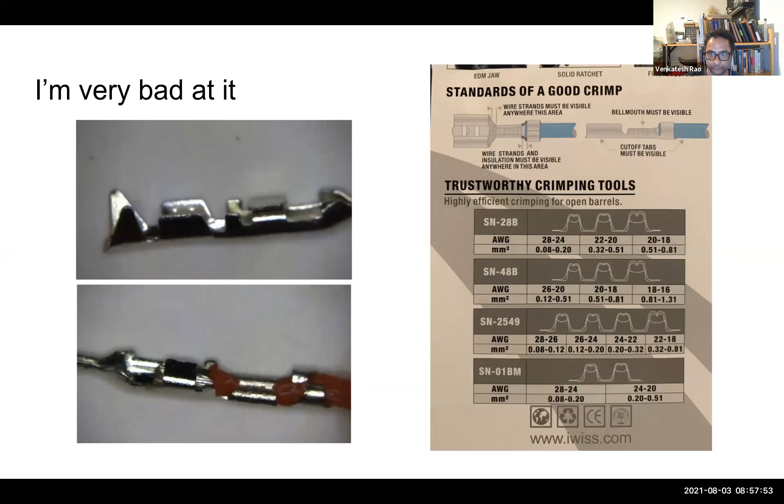And by the way, it tells you something that NASA has scary, scary standards for wire connection. They have a whole separate manual for soldering. This is just crimped connectors, and they prefer crimped connectors because you don't have molten solder flowing through stranded wire - creates both mechanical and electrical problems. So for a lot of reasons, they prefer crimped connectors.

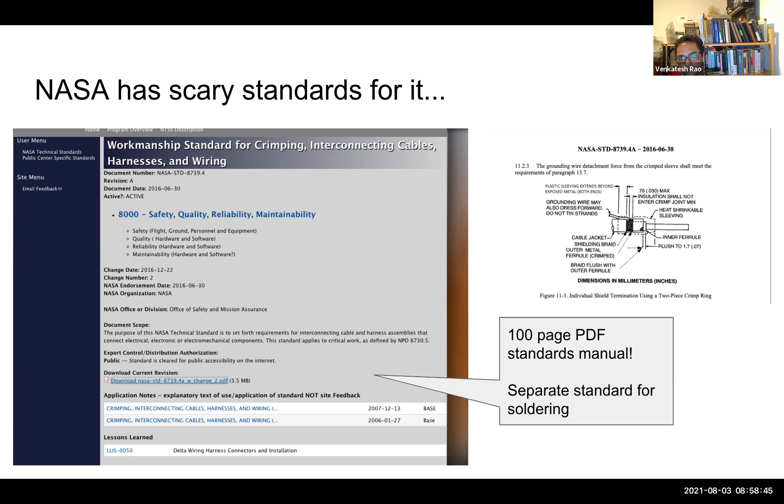I still haven't thought it through, but NASA has a 100-page manual just on doing crimped connection interconnects properly. I was scared looking at their precise standards - look at this, how much strain it has to be able to handle, all that kind of stuff. It's worth just looking through this manual just to get an idea of how stringent space assembly of wire harnesses is for things designed to go into space.

Okay, so that was my wire harness section. Final fun section - I wanted to design and build my own wheels and tires. PLA is not a good material for traction surfaces because it's hard and slippery. It won't hold well on anything except carpet, so you need something softer.

I thought of doing PETG with low density prints, but PETG is really hard to print and I still haven't figured out how to print it. And I wasn't expecting to be able to print TPU - I forget what TPU stands for, trans-something - anyway, it's a rubber-like filament.

And my initial prints were terrible, like on the left. But then I found some information online on how to do it right. Its basic trick is you have to slow the hell down - you have to go really, really slow when printing TPU and lay down layers very slowly. And a couple of other tricks, how much you retract the head and stuff like that. But once you get that figured out, you get nice, clean prints without all these hairy strands coming off.

So basically now I can design and print my own tires. And now that I can do that, I'll print PLA hubs, tires, mount them on, and I can do my own wheels.

So this was like a little victory I didn't expect to have, because I was thinking of going with just toy wheels that I could buy. But the standard ones I found weren't the right size. And in the design I showed you, I think currently my design is about 50 millimeter wheels. But basically this gives me flexibility to do my own wheels of any size.

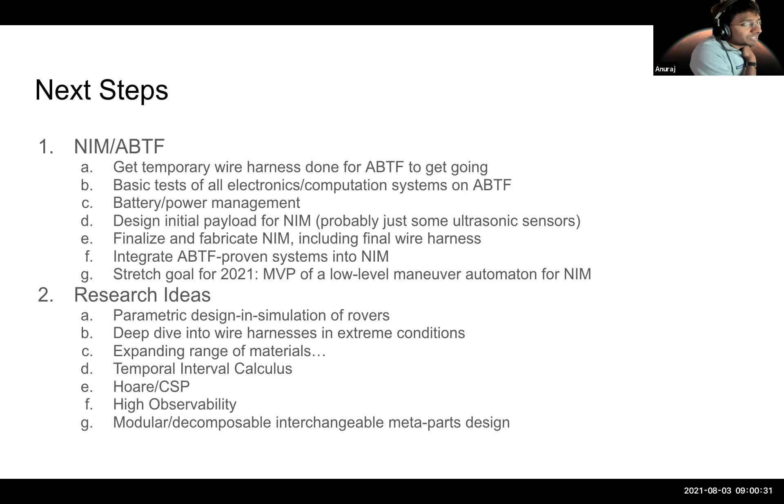But what is the speed with which you print TPU? TPU is about half to 1/3 the speed of PLA. I think I was going 18 millimeters per second. Whatever, it's about 1/3, from 50 to 18. Yeah, if you have a 3D printer, I recommend buying some TPU and playing with it, because it also creates all sorts of fun soft parts. I'm planning to print a bunch of bumpers with it.

I should mention the drone crowd seems to really like TPU, because drones crash all the time and you want to protect your drones. So they try to make all the connector plastic parts out of TPU. And you can vary the properties of TPU very easily by changing the density. If you print at like 20% density, you get really soft rubbery things. And if you print at say 70 to 80%, you'll get a very stiff rubber. Actually, let me find my print and bring it to show you.

So is TPU softer than PLA? Yeah, it's much softer. Can you see? I can press it. So it's compliant. This is, I think, printed at about 20%. So 20% is fairly soft. I think this is about what I would need for tires. But you can see it took a long time to get there.

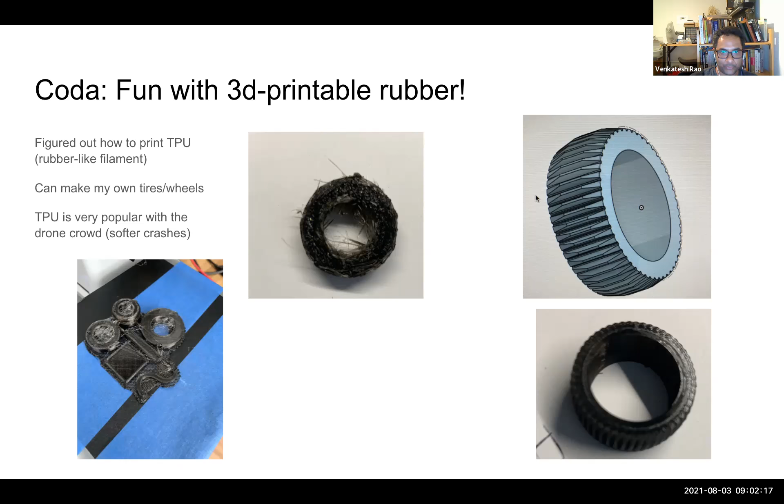So I have these PLA wheels, and then there is an outer covering as an optional part. I could print that with the TPU. I would recommend it if you're willing to do that experiment, because my suspicion is PLA, even if you print it at low density, would just make it structurally weak. It won't actually give it the soft elasticity that'll make it a good tire. But anyway, it's fun to experiment with more materials.

That's why, even though it was not strictly necessary, I made this composite plastic and aluminum design, just because I wanted to get experience integrating different materials together. Aluminum and plastic, I think, are the two basic materials you need for most of these builds.

Okay, so can you next say something about the wheel design? You put a lot of work into the mechanical design and explained the logic and reasons for it. How did you design the wheels themselves? Did you map them to a surface? Why did you choose TPU? Obviously it's better than PLA, but is it more suitable?

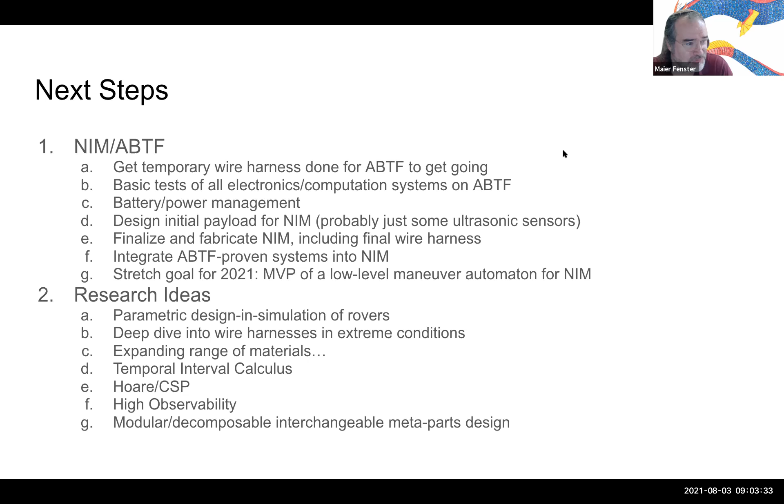You know, it's the only 3D printable filament on cheap low-end printers that'll create soft rubbery materials. The other options are, you could work with actual injection molded rubber, or you can buy rubber tires that come for hobby cars. There's a whole market on Amazon. If you search, you'll find lots of rubber tires of different sizes that the RC monster truck people use, but it's limited. It's build or buy.

On the buy side, you're limited to toy car parts and hobby racing type things. On the build side, if you're 3D printing, TPU is pretty much your only option. If you wanted to, you could buy stock rubber and actually cut it with a knife or something and machine it that way. That'll give you a few more options of materials to work with.

And this is all Earth materials. None of this would work in space. They would go brittle, and that's why they don't use rubber on Mars. I don't want to go into that right now, because this is still Earth rovers, right? But if you wanted to do a lunar rover style, that's the wire mesh type weird tire. Mars rovers use very thin, stiff aluminum things.

Yeah, all that is worth exploring as a whole research topic in the future on its own. These days you can get desktop injection molders. Have you heard about it? Oh wow, okay, desktop injection molding is way farther than I hope to go. But yeah, I would actually like to mention a very commonly used process, which I've also done many times: casting of printed molds.